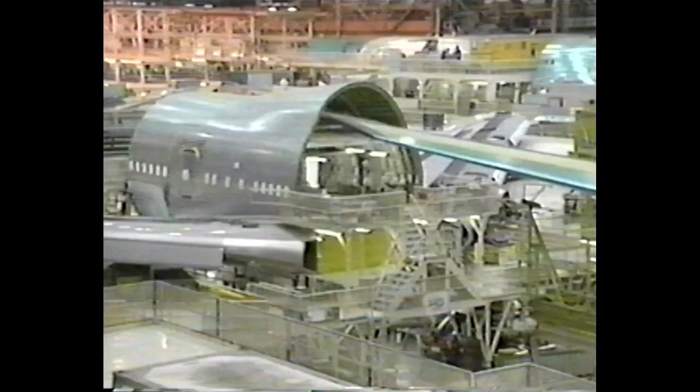In a relentless succession of sevens, they produced the 727 and 737, followed by the 747, the famous jumbo, and more recently the 757 and 767. Now the company has decided to add yet another plane to the stable, the 777.

It's time. The world is ready for a new airplane, one that will take us into the next century. Designed and built by people empowered with forward-thinking ideas, by a company that knows the airplane business inside out.

Introducing the Boeing 777. Each week, there's a chance for some of the 10,000 people involved in the 777 project to meet senior Boeing managers. Today, they get an explanation of why the world needs a new Boeing airliner from Alan Mulally, Vice President of Engineering. The airlines of the world told us they wanted an airplane bigger than a 767, but smaller than a 747.

And we said, why don't you buy 767s? They said, we want an airplane that's bigger than a 767 and smaller than a 747. So we said, well, that costs a lot of money to make a new airplane. And of course, you know what they said again. We would like an airplane that's bigger than the 767 and smaller than the 747. You know, satisfying your customers is really hard work.

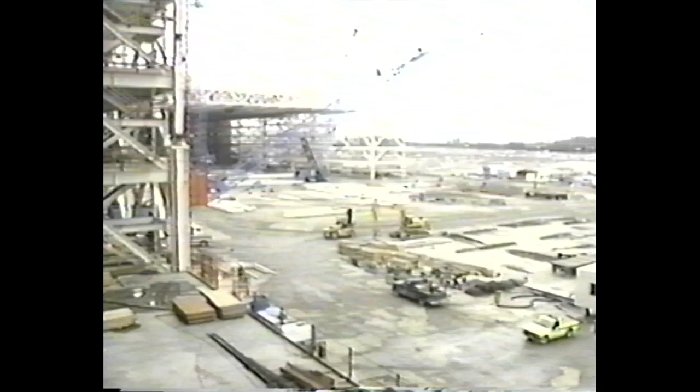The Boeing company is based in Seattle, in the northwestern United States. Commitment to the 777 has meant building a huge new plant at Everett, to the north of Seattle.

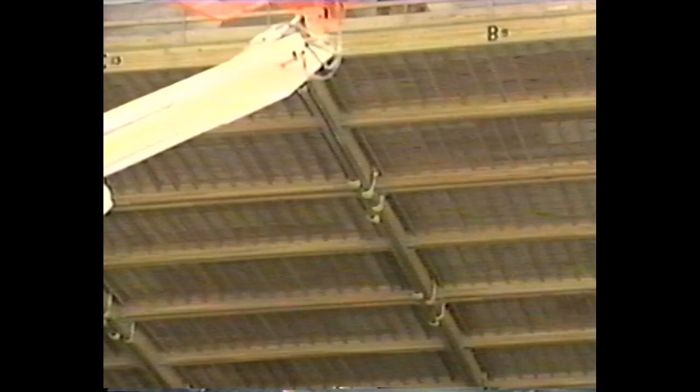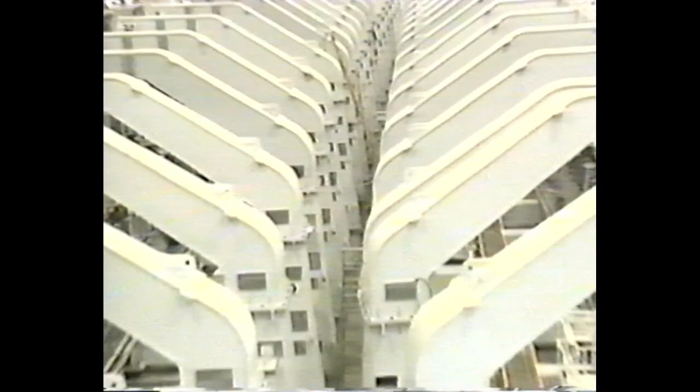Boeing has promised its customers that it'll start deliveries of the new plane in May 1995, although at the end of 1992, it is not even fully designed. In January 1993, this plant will start to assemble parts of the first few planes on one of the world's largest tools. When this giant rig is working, it'll be capable of assembling the wing spars for one plane every 3 days.

To get an idea of how big the 777 will be, here's a smaller Boeing plane, the 737. Like the 777, it has 2 engines, but there the comparison stops. The 777 looms over the 737 when they're side by side. Its engine is the same diameter as the body of the 737, and the horizontal stabilizers, the flat parts at the back, are almost as long as the wings of a 737.

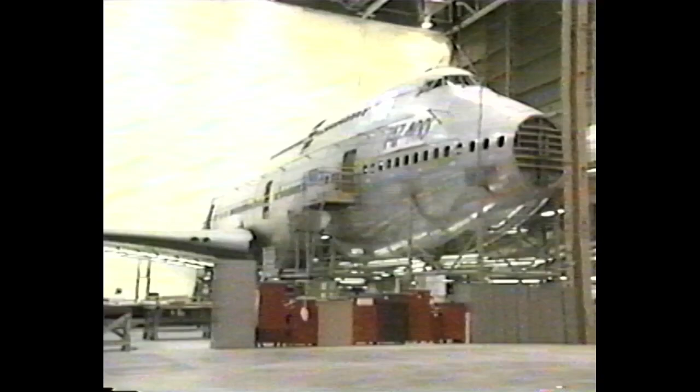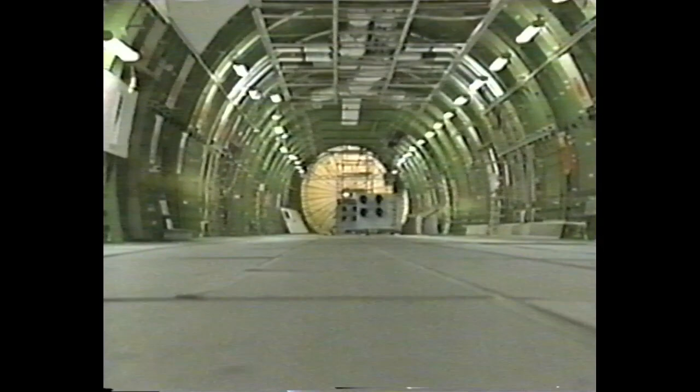The 777 will still be smaller than a 747, although after 25 years of improved technology, it will have almost the same capacity and range as the first jumbos. With previous Boeing planes, a full-size mock-up like this 747 had to be built during the design stage. It's a plane that never flew, complete in every detail. It was the only way to ensure, before going into production, that all the parts fitted together.

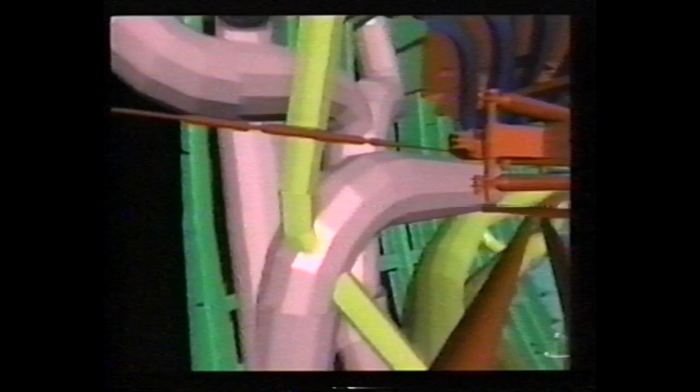To design and build the 777, Boeing have switched to a pioneering computer-aided design method using 8 powerful computers, the world's largest collection of mainframes hooked up for one purpose. The system is called CATIA, and it contains precise descriptions of every structural component, every duct, every wire, every single fastener inside the computer at life size or larger. It's called a digital mock-up because it allows pieces to be moved around, changed and checked to see that they don't interfere with other pieces - what used to be done with a full-size physical mock-up.

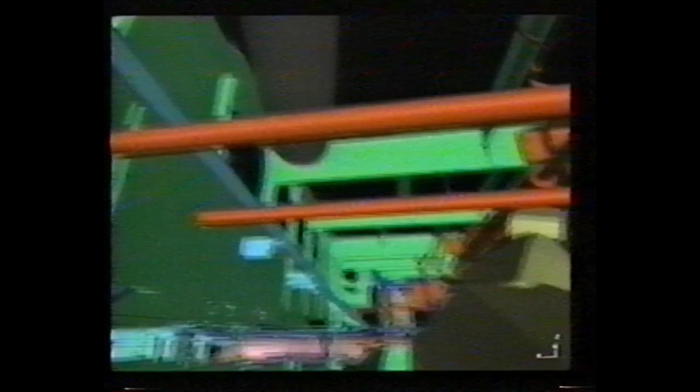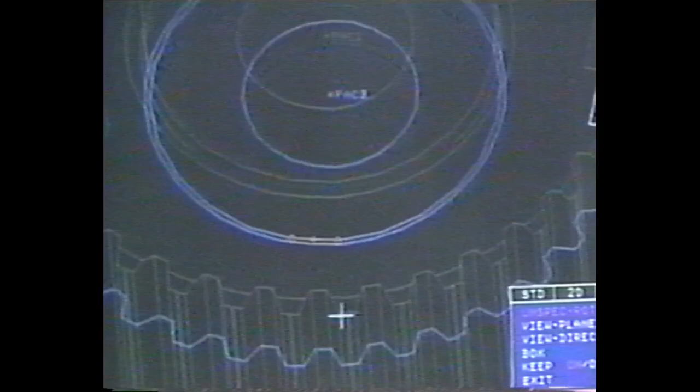CATIA is part of a major change in plane making. That means that engineers share the design task with the manufacturers instead of finishing their drawings and then passing them on, as they used to. The old 'throw it over the wall' business of, here's what I insist be the case, now do what you can with it - that's gone away. But in order to really make it go away, you still wind up throwing it over the wall. You just have to accept it when it's thrown back, and that's the difference.

The bane of every designer's life is when one of the parts he's designed gets in the way of a piece designed by someone else. But with CATIA, any interference between 2 parts shows up in red. I do indeed have a little problem here, but it's a very small one. We haven't released any drawings yet.

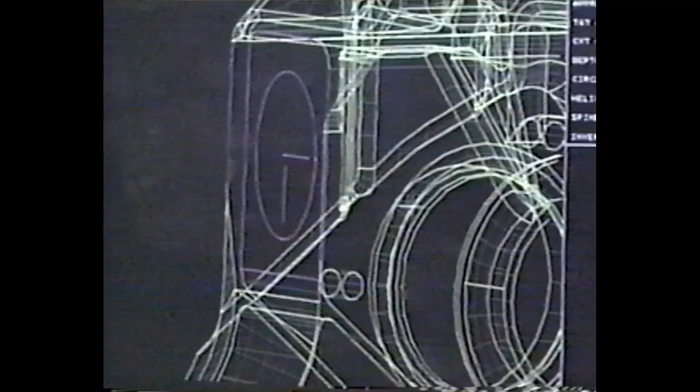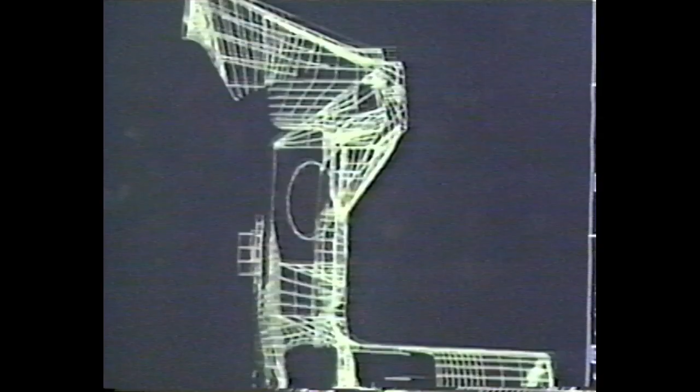Here we go with the stresses in the model in this particular area. What I did was zoomed in right here. These designers have discovered that one of their components is thicker than it needs to be in certain areas, and you can see in this area, we've got some low stresses. Using the CATIA system, they create a hole in the piece and save some weight without changing its function. The system now recalculates the new stresses to show that they're within acceptable limits and works out how much metal will be removed if the hole is made. In a plane that weighs over 500,000 pounds, the weight reduction, about 1/5 of an ounce per door, will still make a useful saving.

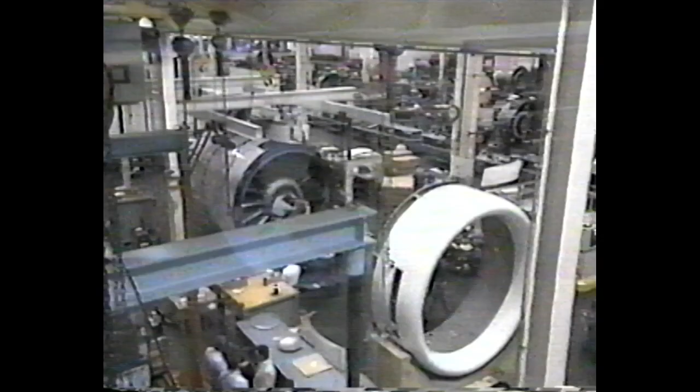The 777 will be powered by 2 large engines. With the increase in power and reliability of jet engines over the years, there are safety and cost advantages in having 2 powerful engines rather than 3 or 4 less powerful ones. The engines will be tested on the ground in 3,000 simulated flights, several engine lifetimes of in-flight activity. Even if one engine fails, the 777 will be able to fly on the other for up to 3 hours, allowing the plane to be scheduled on long routes across the world's oceans.

As far as flying over water in a twin, I'm very comfortable. The airplane can fail an engine on the runway, and it's either going to stop or it's going to fly. We designed it to do that. It can fly en route on one engine. I've probably spent hundreds of hours in these kind of airplanes on one engine, so I'm not concerned about that.

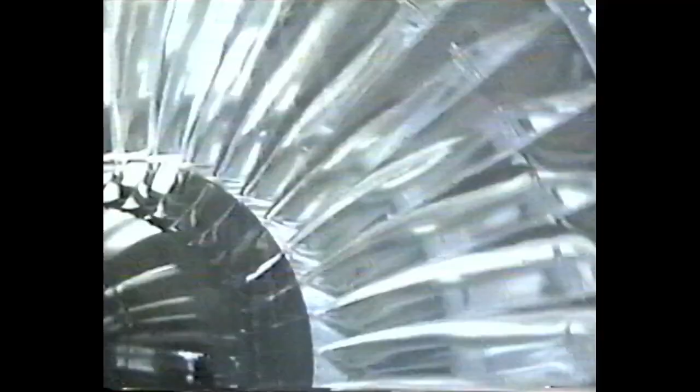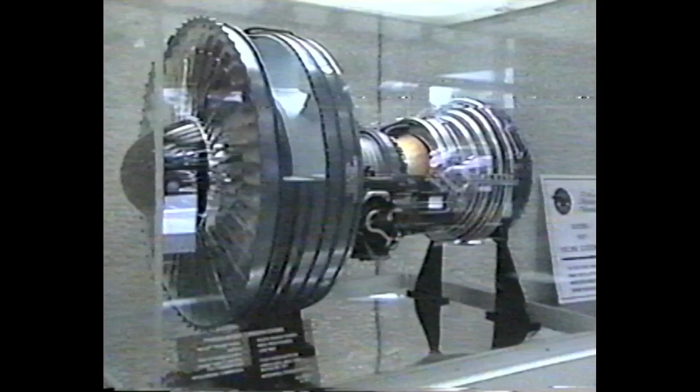The job of a jet engine is to suck, squeeze, burn and blow. Air is sucked in and compressed by these blades. Then it's heated to high temperatures by oil burners. Most of the air rushes out at high speed, while the rest turns turbine blades which drive the compressors, helping to suck more air in. Each 777 engine will generate a thrust of up to 84,000 pounds.

Some of the 777 engines are being made by Pratt & Whitney. Today is a special occasion when maintenance engineers from the companies that will buy the plane give their views on the current engine design while there's still time for final changes.

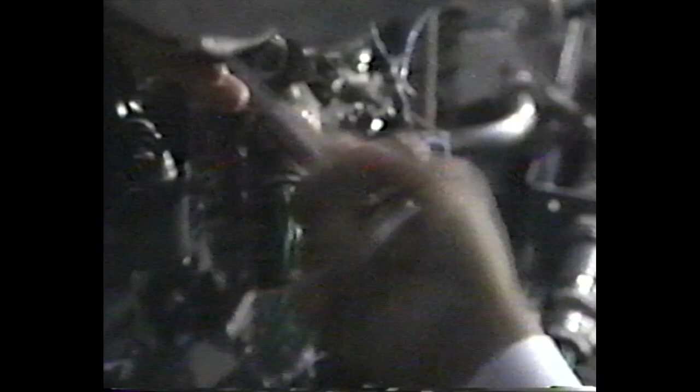The engineers will be allowed to swarm over the engine, poking screwdrivers, spanners and torches wherever they like, to see whether, on a wet and windy night in Tokyo or Chicago, it'll be possible to remove a particular part, several layers deep in the pipes, tubes and cables.

This is another thing we've had trouble with over the years, these captive fasteners. When you're outside at midnight and it's 10 below zero and this thing falls out and goes through a sewer or something, you go try to find another one, and it's not there. I've always wondered why they couldn't just put a bolt in there.

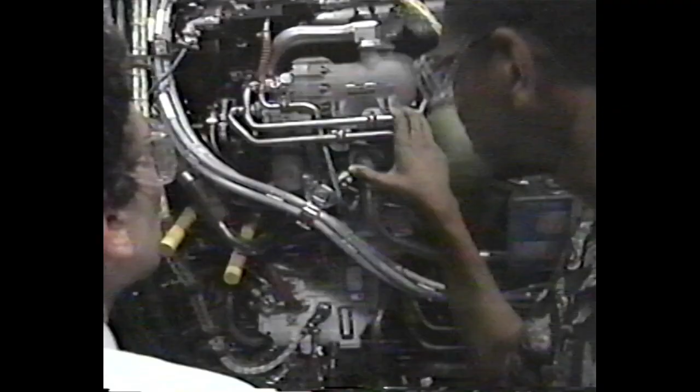Is this motive fuel here? No, here, let me show you right here. Is this motive fuel or this metered fuel?

What you don't want to do is have to remove the drip shield to drain this. You'd like not to have to, it's just one more thing you've got to do, and it's going to take that much more time. So you're just saying like a petcock with a tube on it? With a tube on it. That's what I think he's talking about.

You can see over here the olive shape, that's our new seal. The thousands of people who design the plane are organized into about 230 teams called design-build teams.

For the first time, Boeing has included representatives of the manufacturers in their design process. This team is responsible for designing and building the passenger doors, which are to be manufactured by a Japanese company. The manufacturer's input helps smooth the transition from drawings to factory. In some ways, the design-build teams are a reminder of what earlier plane makers could do.

If you go back to the early airplanes that Boeing built, the factory was on the bottom floor, engineering was on the upper floor. Both manufacturing and engineering went back and forth. When there was a problem in the factory, the engineer went down, looked at it, and said, well, you better do this.

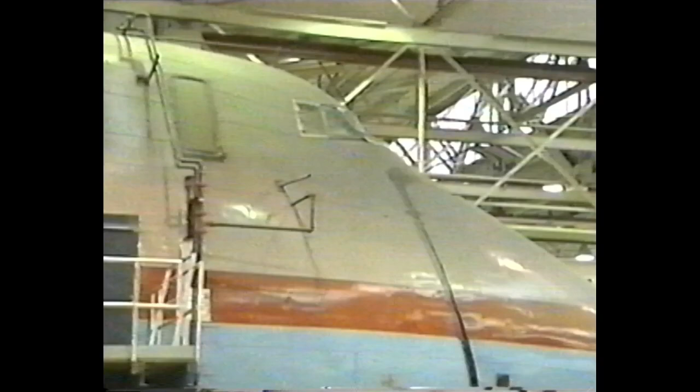The entire design department was within 50 feet of each other. As the scale went up, that gets harder and harder and harder. The fresh approach of the design-build teams means that every component of the 777 has benefited from a design rethink.

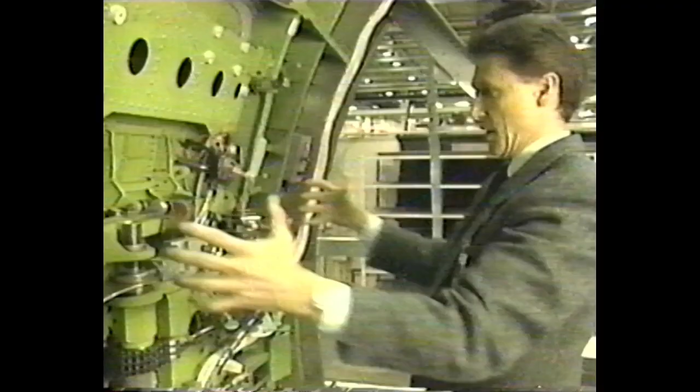The traditional Boeing doors actually come in, twist sideways, and go out sideways, inverting themselves. What we found on this new airplane program is that the forces to do that are getting up there, especially on a door as big as this. So we thought we'd look at a new door concept.

On this concept, all of the weight of the door is hung on this hinge, which is bolted to the airplane, and the loads are vertical, so the hinge can take all the load. If this were tilted like so, you'd be pushing the door uphill, but we don't have that problem. We have simple and efficient bearings, so the total load to push the door open is actually quite small, and it can be pushed open with one finger.

In the early stages of door design, Gaffney realized that with 8 doors on the plane, each requiring about 1,000 separate components, it would make sense if each door could have as many parts as possible in common with the others. But that wasn't easy.

What we recognized early on was that the key to making all the parts common was to make the hinge common, notwithstanding that the shape of the body was different. I put one of my best guys in charge of hinges and asked him to go research and come back and show me how they could be common. He came back after 2 months and said they couldn't be common.

I did a little management ploy. I said, fine, who do you recommend to follow up on this, and we'll let him give it a try. With that, he said, well, maybe there's something else I can look into. And lo and behold, it took him another month, but he had that dedication, and he pulled it off.

Unfortunately, after he was done, we changed the contours of the airplane for better aerodynamic performance, and he had to go back and do it again. But he knew he had done it once, so the second time around took him about 4 weeks, not 3 months. Then, of course, what did we do? We changed the contour again.

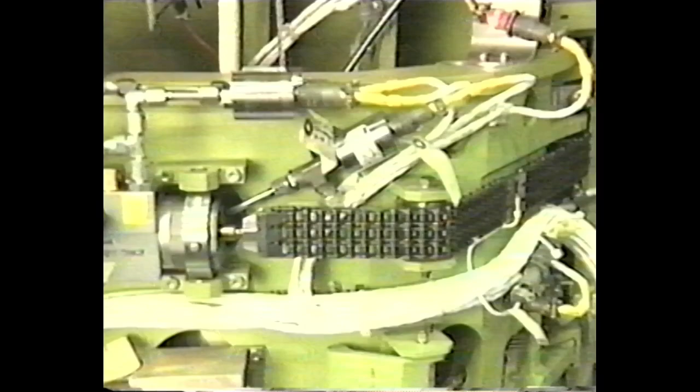But by now, he knew the techniques to use, and he got the hinge to catch up in a week. And that was the key. Right now, not only is the hinge common, but all the mechanism is common. Indeed, 98% of all the mechanism of the door is common. So it was a critical design discovery, a critical design implementation, and fortunately, the guy had the smarts to pull it off. Although the 777 is over 50% heavier than the 767, these new techniques mean that in man-hours, it'll take about the same time to build as the earlier plane.

We found out that a lot of the cost of the airplane was not in building it, but in rebuilding it until we got it right. So when we started off on this new door design, I and my crew went up to Everett, where the last airplane was made, the 767, and we went through all of the changes that happened on all of the doors on the 767.

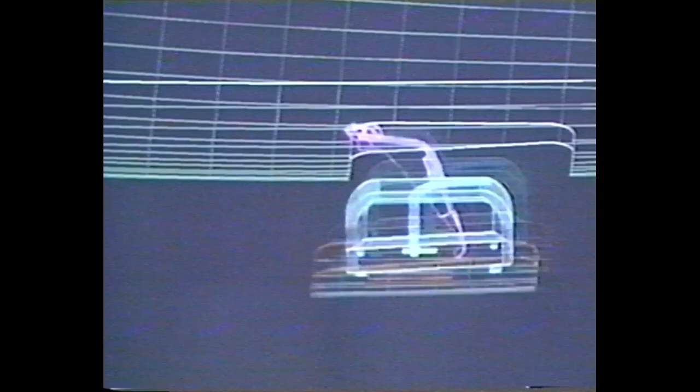Matter of fact, we looked at 13,341 changes, cataloged them as to what the cause was, but more important, we looked at the new initiatives we've got on this airplane program, and we picked what initiative would solve that problem, would obviate that mistake, would make that mistake not happen. We also assigned a dollar value to that mistake. On doors alone, according to our assessment, $64 million was spent just in changing the design. And we felt that if we applied the new initiatives in the order that these costs come up to, we could save all of that money on these doors.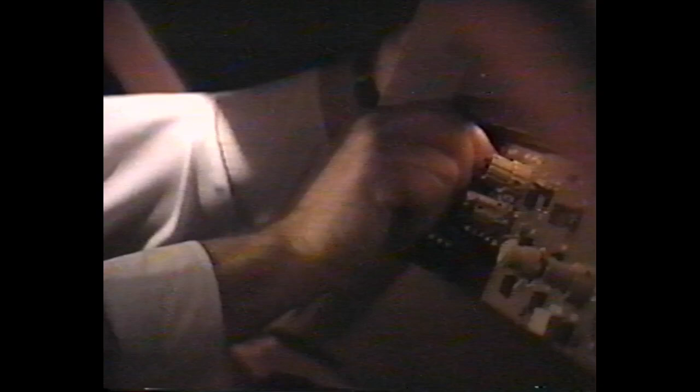This is how the 777 cockpit will look, glowing with new liquid crystal display screens. Pilots will undergo a conversion program in a simulator like this to teach them to fly the new plane. And John Cashman, the 777's chief test pilot, is helping the designers to make every detail as user-friendly as possible. That's where people are going to be rubbing the forward edge of the panel.

It may seem an unnecessary level of detail, but giving a control knob a definite feel of being on or off can be an extra source of information for a busy pilot. Hopefully it feels better in positive response, but it's just a little backwards in the way it... What do you think? Is that acceptable? Or if you do it slowly, you hardly tell the difference. If you do it fast, you can feel it.

Are all the letters the same size, height? Same height, yes. Do they have to be? Well, I'll get my bag and we'll swing back there.

Cashman is responsible for all the 777 flight tests, and he'll have the privilege of being the first pilot to fly the first 777 in 1994. He and his team of test pilots will also take the plane through a grueling series of maneuvers that check how well the plane will survive in extreme conditions. But those flights are 18 months away.

For the time being, since the 777 doesn't yet exist, he's currently getting flying time on a Boeing 757. It's part of a program to try out the new flight control system that will eventually be installed in the 777. The 757 is a much smaller plane, but it's been adapted to use the 777's electronic system, called fly-by-wire, for carrying the pilot's instructions to the flaps, rudder, engines, and so on.

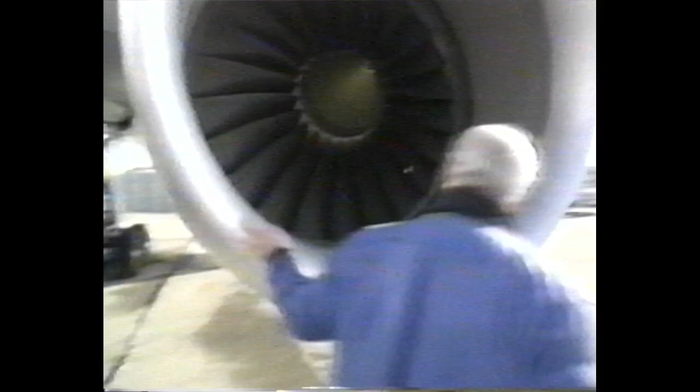During today's flight, they'll be carrying out a number of takeoffs and landings to feel how the plane settles into its landing position with the new controls.

I remember what we saw in those early flights. I don't think it was that high. No, they said 65, 70 pounds at the most, and I had 105 pounds. Yeah.

The 757's own controls use the traditional system of cables and pulleys stretching the length of the plane. The joystick pulls on the cables to trigger hydraulic devices that move the wing flaps or the rudder. Fly-by-wire replaces this cumbersome physical system with electronic signals and uses computers to adapt and interpret the signals to give smoother flight and more responsive landings and takeoffs.

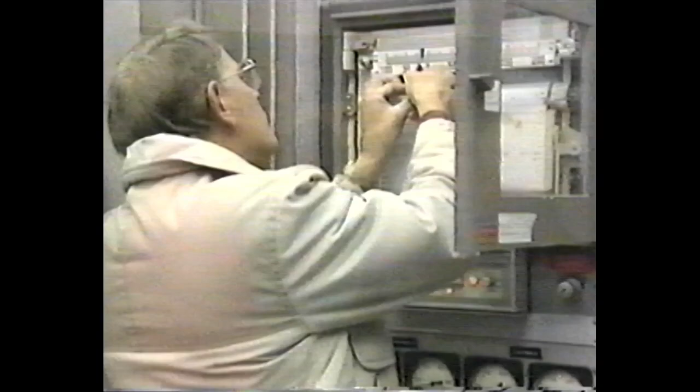On a hot July day this year, it's 50 degrees below freezing in Boeing's environmental test chamber. The passenger doors team are ready to see if their door will perform under extreme weather conditions. If the plane lands from a cold flight, minus 65, and comes into an airport where, let's say, it's about 28 degrees, there's freezing rain, and it pulls up to the gate, and this freezing rain adheres to the outside of the airplane, we need to make sure that we can open the doors. Our criteria is a quarter inch thick of ice all over the whole airplane, and yet at the same time, someone with nominal handle force on the inside can indeed open the door.

Technicians start spraying the outside of the door with water. Working in shifts, they'll spray throughout the night.

Welcome to the Bahamas.

Early the following morning, the engineers are ready to see whether the door mechanism can overcome the effect of a thick layer of ice. Test regulations say that the door should open easily even when it's sealed by a quarter inch layer of ice. But they've never done this before.

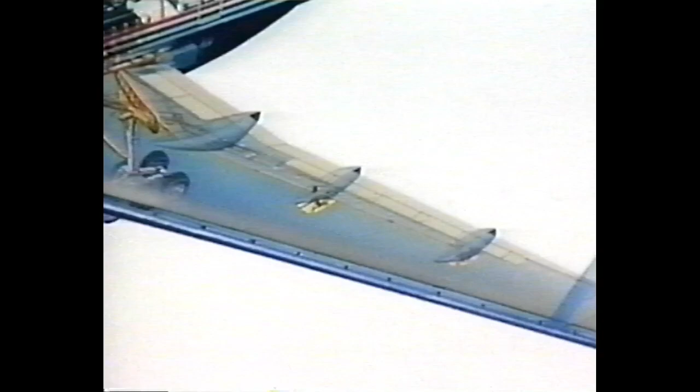One of United Airlines' contributions to the 777 concerned a flap made of carbon composite on the back of the wing. It's a beautiful flap, 43 feet long, but our autoclave that would do the repairs is only 25 feet long. So our math quickly told us that if you put this thing in the autoclave at United to apply the heat and pressure needed to fix it, you couldn't close the door. Meanwhile, Boeing was building a 60-foot long autoclave and had no problem with it. So we said you've got to either break this flap in half so we can fit it in for repair someday, or at least make provisions for us to saw it conveniently down the dotted line so we can get it in someday.

And that's what they did. They actually beefed up the honeycomb inside the flap to permit us, if we ever had to, to saw through there, make a repair in our short autoclave, and then put it back together with a splice. Not the best looking thing, but a lot better than if they'd spliced it originally and flew around from day one with a big two-part flap.

Another of the airlines had a much smaller worry than a 43-foot flap, but to them just as important, a problem in the lavatory. By talking more to this airline, what we found out was really on their mind is that in flight, when a toilet lid or toilet seat falls down in the toilet bowl, it makes what they called the big hit sound, the big bang sound. And they found that was very distressing to the traveling public.

So we went to work. We got the mechanical designers, the electrical designers, and the toilet suppliers and makers of toilets and toilet lids together, and we started to work on a small device that we could put on the back of the toilet lid. You can see this device right here. This little device could go on the toilet lid, and we could put another piece on the other side that could hook onto the toilet seat, and we could absorb the energy of the toilet lid and seat before they hit the toilet bowl.

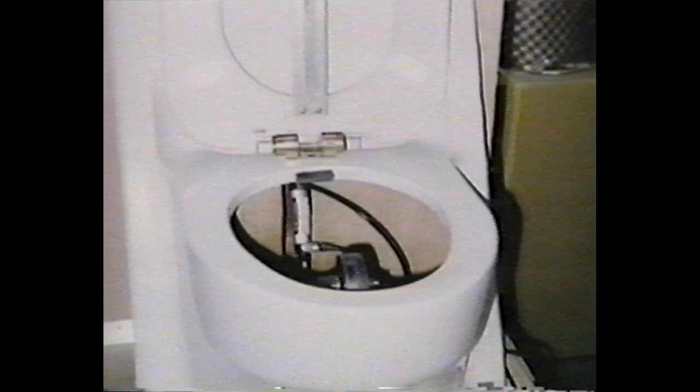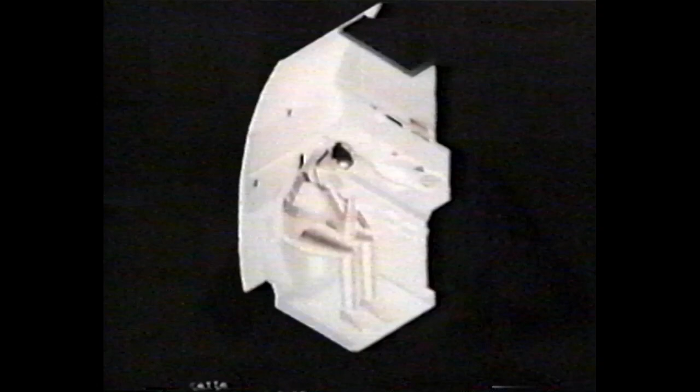And as of last week, we have completed 670,000 cycles of this toilet seat going up and down, and we have got it down to 0.7 of a pound for each device. It's reliable, and it looks like it can be installed cost effectively, and that's what airplane design is really about.

On August the 31st, Mulally and Condit had something new to think about. The board of the Boeing company set in motion a chain of events that started with Condit.

I changed jobs. That's something I've done more than once in my career. On the 31st, I got elected president of the Boeing company. I was called in by the bosses, people I respect and work with, and they told me that Phil was going to be the president of the company. I was really excited that Phil was going to be president, like everybody else. So I leaped from my feet, reached across the table, grabbed his hand, and said, 'Congratulations, Phil.' Then I leaped across the table the other way to Dean Thornton, who now works for Phil, who Phil used to work for, and shook his hand and said, 'Congratulations, Dean. Great choice on picking your boss.'

Then I sat down to get ready to leave, thinking all the time it was really terrific that they would take time in their busy day to let me know that my boss had been promoted. And with that, they said, 'Alan, we would like you to manage and continue to lead the 777 program.' And my reaction was, 'What? I'm really busy.'

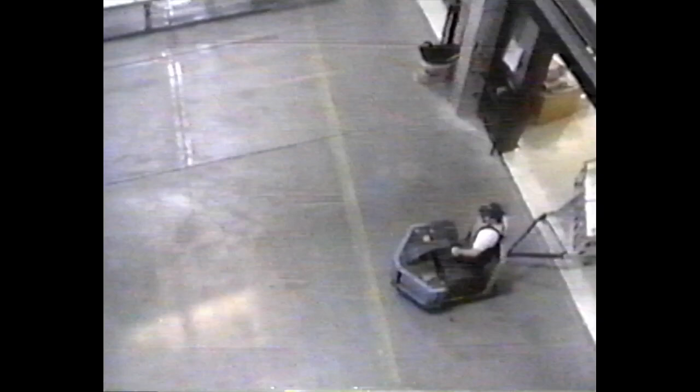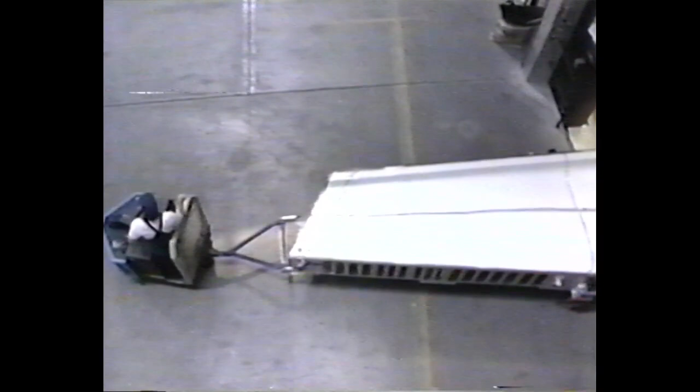ASTA has an October date for baking their very first 777 rudder in a large pressurized oven called an autoclave. It's a bloody big job. It's a very large component, bigger than some airplane wings, and made of layers of carbon fiber over a honeycomb core.

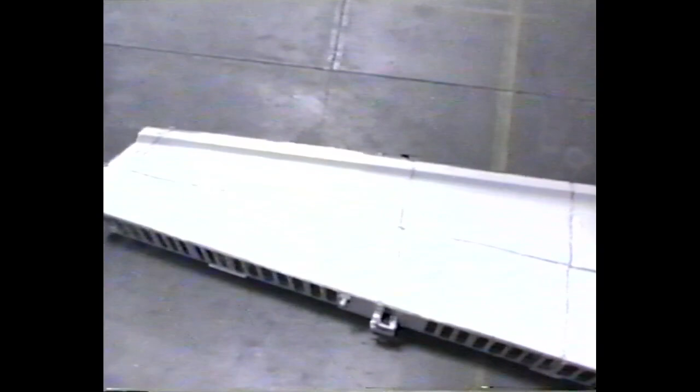Earlier in the year, there had been some concern about potential vibration problems, and the rudder team in Seattle has now decided to change the design of the rudder. For the ASTA people, it's very worrying.

We'll be running all kinds of extensive tests, and they'd find out that the first one was a harmonic vibration, basically, and to dampen that they put on some counterbalance weights. This one, they needed some additional load stiffness in the rudder, and they've increased the thickness of the plies on a panel like those, the two skin panels, and some of the internal structure of it.

Don't hit the bloody thing.

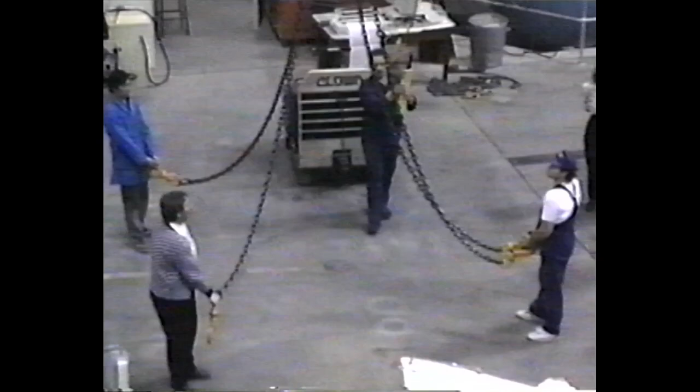The patience of the ASTA manager in charge of the project is sorely tried. I was cheesed off about this change, and I'm not exactly that happy today because we set out to achieve a whole series of things with this particular rudder, the skin. We'll achieve most of them, but probably the thing that worries me a little bit is that the configuration will change, and it's going to change fairly dramatically, and we still have to deliver on schedule. We've got a requirement to deliver this rudder in the middle of next year, and if we're late on that, it puts Boeing in a bind, and we don't want to do that if we can possibly avoid it.

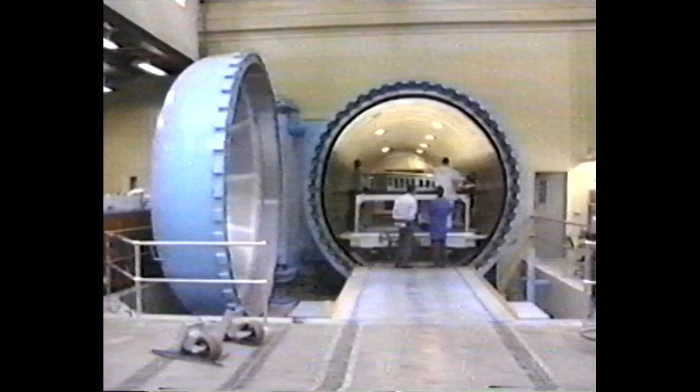At this stage, before baking, the material of the rudder on its rig is soft and pliable. After baking, it'll be as solid and as tough as aluminium, but much lighter, if everything goes to plan.

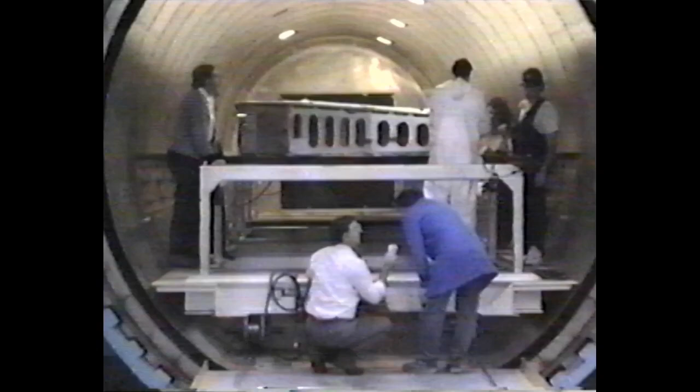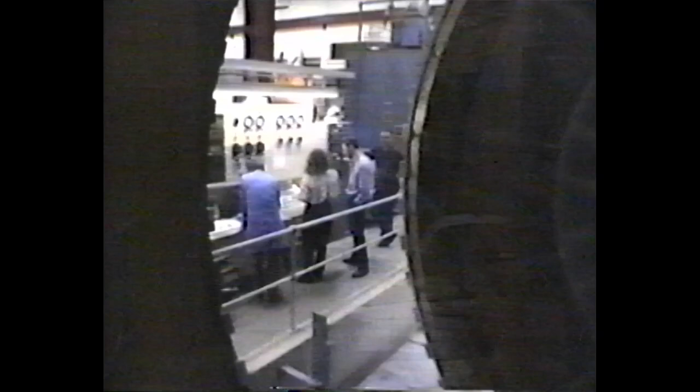The rudder is to be baked at a temperature of 177 degrees centigrade for 7 hours. These thermocouples are temperature measurement devices, being installed all over the rudder to make sure that every part of the rudder skin reaches the right temperature for hardening and toughness. It's the first time they've baked such a huge piece, and evenness of cooking will be essential.

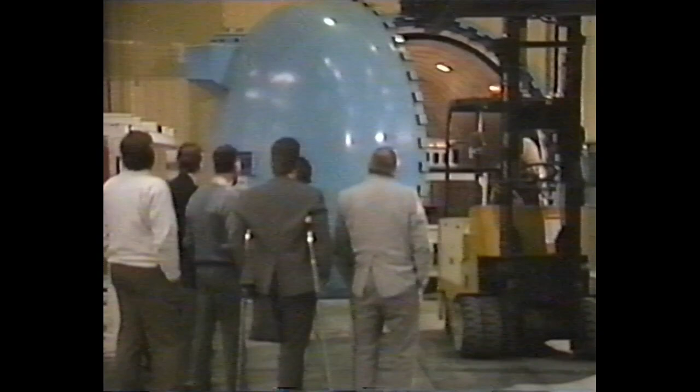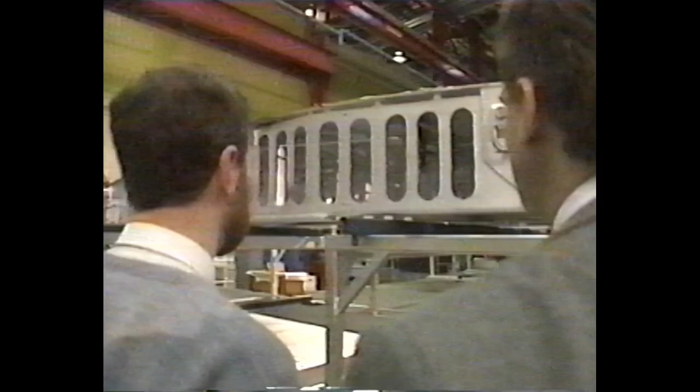Over the weekend of October the 3rd and 4th, the rudder is baked and left to cool. Then, the moment of truth. It is ready to be wheeled out, covered in its plastic bag and paper coating. The key question is, has it retained enough of its intended aerodynamic shape with the required accuracy, a few thousandths of an inch?

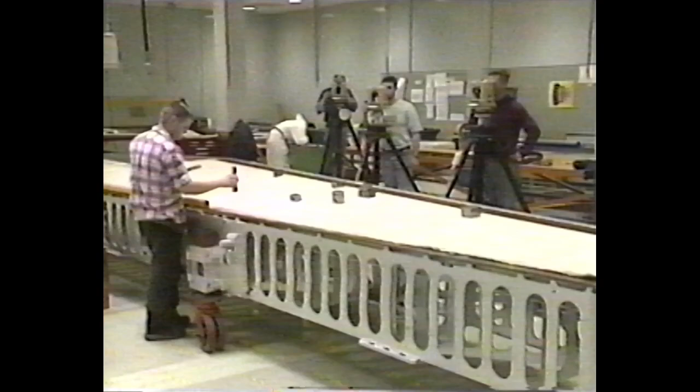Surveyors' instruments, theodolites, are used to measure the exact position in space of a series of target reference points. Some of the points that the engineers thought might have moved from their original position have hardly changed at all. So the Z's moved hardly at all, there's one we hope, so they must have pushed that back down again.

But there's a problem. As the computer data from the baking become available, it turns out that 4 of the most crucial thermocouples have not worked.

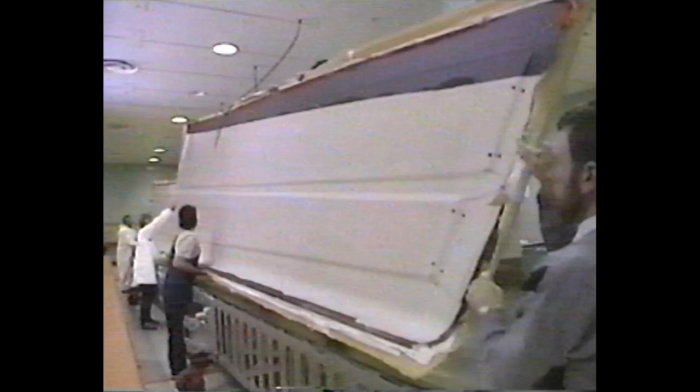Hand it to the Unidexter.

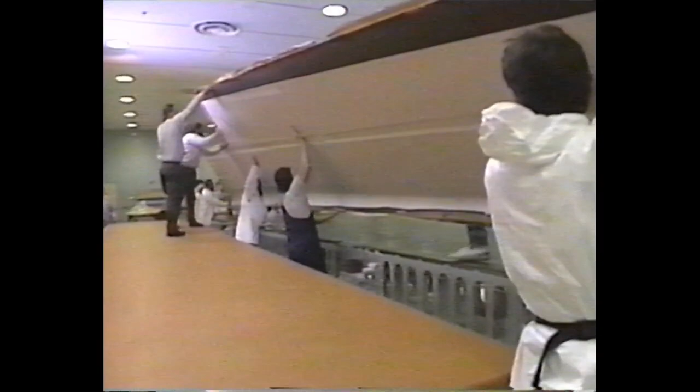The thermocouple problem doesn't seem to have affected the shape, although they now need to look at the other side, a task that requires a coordinated effort by the whole team.

Bit more support. Take it straight down. Do you want that edge over the edge? Yes, we're just getting a kind of a pretty picture of it right now. Then you get it all trimmed off and you can index everything carefully. It looks pretty good.

I'm still nervous about it because I've got to make sure that the shape is right. So when we get all the trim off the edges, lay the templates on there, I'll probably sleep a little better.

On the 29th of June next year, we will be matching the tab to the rudder in a final assembly, and we'll be packing it the following day to send to the States.

October 1994, I think is the date. So we've been on this for a while, but we're going to achieve those dates one way or the other, even with the design problem that we've currently got, which we're still going to work.

All right, thanks, fellas. And if we could just, some of us have got to stay here for another little session, so the rest of us can all leave.

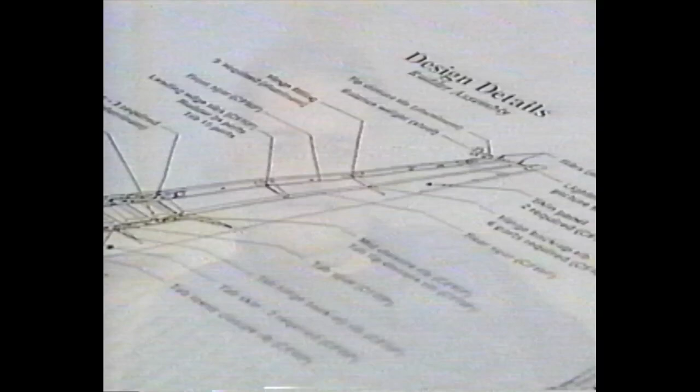But with his more senior colleagues, Tyler makes no bones about his annoyance with Boeing.

Okay, now we've got rid of the rest of the team that participated in building the skin, what we really have to address is the effect of all these changes brought on by Boeing. Lovely company though they may be, they've given us a real problem building this rudder to schedule. It's a pain in the neck right now because we've said we must have that engineering by the 1st of November to give it to the subcontractor.

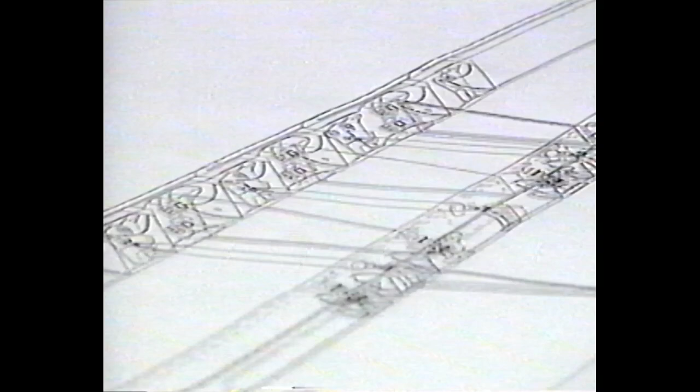But let's assume we're not going to get it. What can you do to achieve it? Because sure as God made little apples, we're going to be late. Have they given you feedback on our letter telling them how we'd be able to save the schedule? Apart from what I believe is some maniacal laughter on some of our requirements, no, they haven't really.

After the meeting, Tyler phones Boeing to report on progress. It's something that I'll get to you so that you can shoot it into Pete Van Vogt.

His main contact there is not pleased to hear about the broken thermocouples. Next time you might want to test them first. Well, we did test the part. We did, that's the problem. And the reasons why it didn't work is something we've got to finally determine. It's not going to be easy, but if we do it right, I think we can get there.

We love you most of the time, but in this case, we don't love you as much as we should.

A week after the mixed results in Australia, the Seattle team responsible for the tail of the 777 meet to discuss the events. Begin evaluating the spar changes, and then I'm going to head down to Australia and face the teeming masses who aren't happy with this. What we're playing with really is the comfort level of the people involved. Calculating these stiffnesses is kind of black magic. For the members of the team in Seattle, it's just one among a number of pressing problems, but for the Australians, it continues to be a major headache.

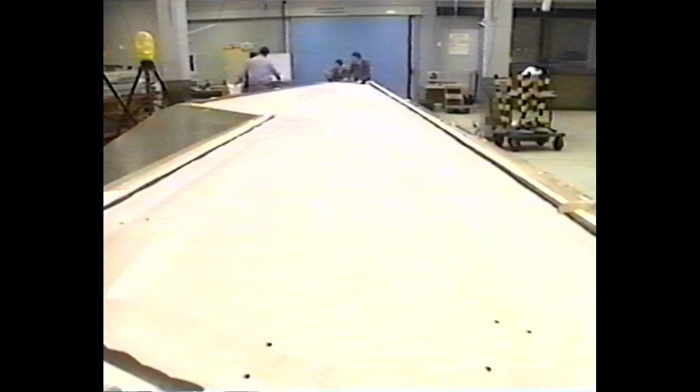Okay. Hello. Now, this is the first class section.

In the white heat of designing the plane, some of the 777 team still find time to think of the customers, the airlines who buy the plane, and the passengers who'll fly in it. With Alan Mulally's new responsibilities as team leader, he had to forsake engineering for a day last month and act as tour guide to Lord King, executive chairman of British Airways.

Now, Lord King, sit down here, and I want to point out a couple of impressions to you. One thing that British Airways... The seats are real, but the rest of the interior is a mock-up of wood and plastic, costing $2.25 million.

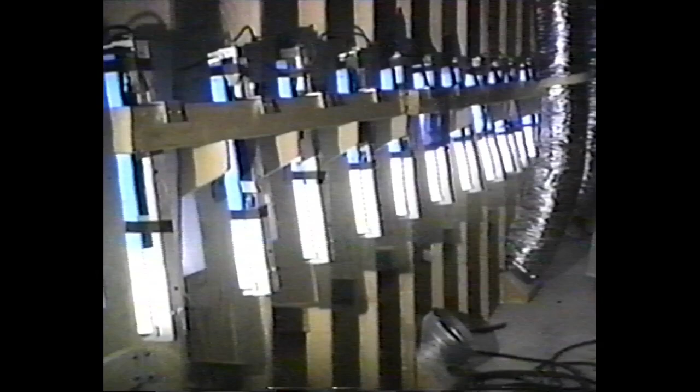Now, how about we move on back. Thai Airways came in here one time and they saw this 7 abreast and they said, if you put 8 abreast in here and 7 rows in here, we can have 45-inch pitch. And some people believe they like this space better than your personal space out, because I believe you have enough here, especially for long flights. Long flights is key.

Where they can tilt you up. And it's totally revenue neutral to us. I mean, it's 56 seats, one way or the other.

Okay, right, let's look at the back, where the passengers travel. This right here is bigger than the 737s and 757s because that 10 abreast we put in the back, we decided that you thought the 767 was an acceptable level of comfort. So another reason for picking the 5 inches is that when you put 10 abreast in the back, those are the same seats that everybody has in their 737s and 757s, and everybody's accepted that and feels that's good, so they're not going to feel like anything was taken away from them.

And so that flexibility is really the key. Then you let British Airways decide by the market each year.

It'll be more than 2 years before BA and the other customers take delivery of their planes. The hectic pace the team have experienced this year can only get more hectic as manufacture and testing begin in earnest to ensure that the 777 will be delivered on time, on budget, and at the right weight.